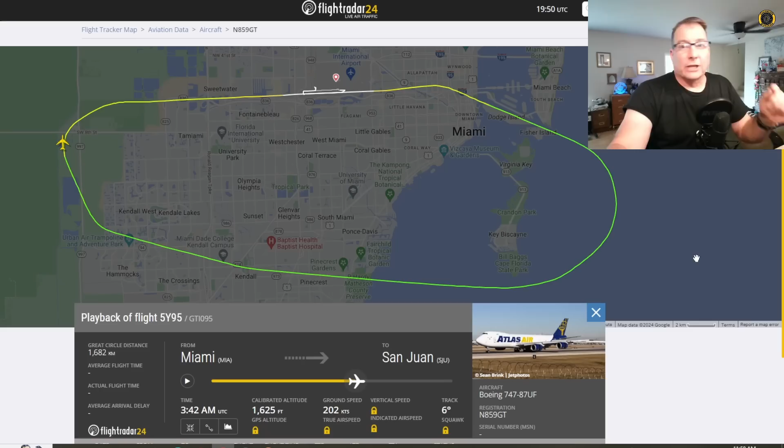They did mention that the fire occurred on the climb out, and that it took them about 2 minutes dealing with this engine fire. So it sounds to me like it didn't quite go out right away, and looking at that video, it looks like that may very well have been the case.

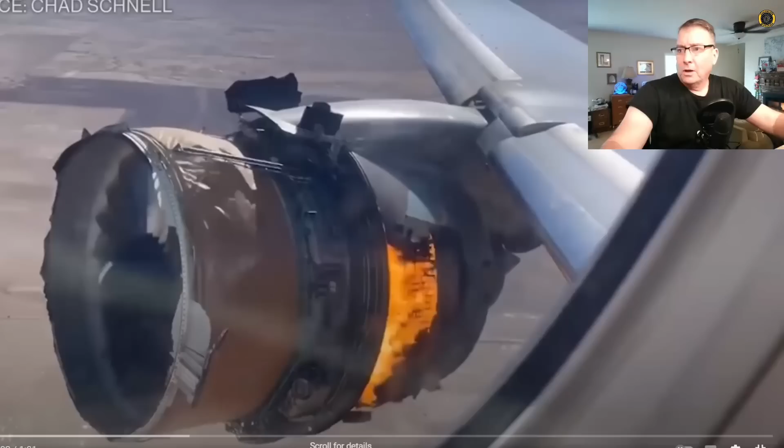That could have been initiated by compressor blades initially failing and then going through the turbine section, losing the blades, but the crew did not say anything about a bird strike or anything like that — they just said they had an engine fire. So I'm suspecting turbine blades. Remember, when you shut down one of these engines, the jet engine will continue to windmill even after it's been shut down, so it may continue to shed a few parts.

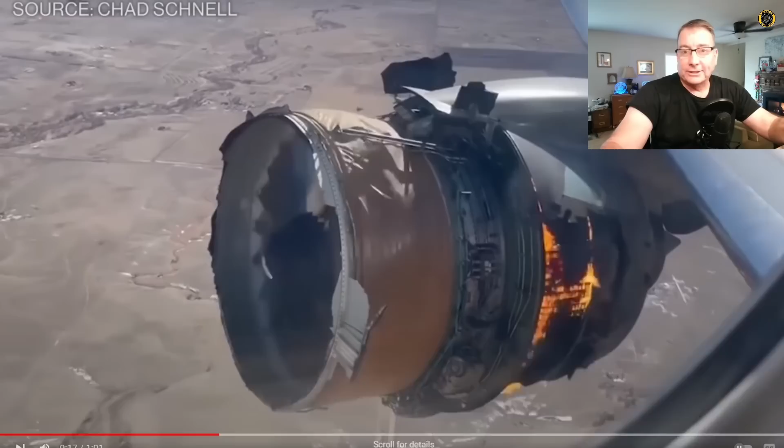This was the Boeing 777 out of Colorado coming back into Denver. This was a rather extraordinary case where they lost the cowling and everything. But the engines will continue to windmill after they've been shut down.

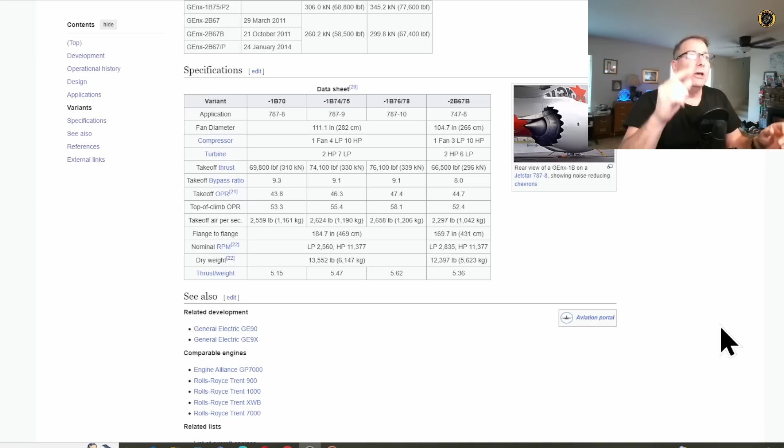This is the GEnx series of engines used both on the Boeing 787 Dreamliner and the late model Boeing 747-8 freighter aircraft. The interesting thing is on the Boeing 787 there's no bleed air system — it's more of an electrically operated aircraft. So only on the Dash 2 models on the 747 freighters does this particular engine use a bleed air system. Like most modern jet engines, it's got a high pressure section and a low pressure section separated by two separate shafts. Here, the high pressure turbine section drives the high pressure...

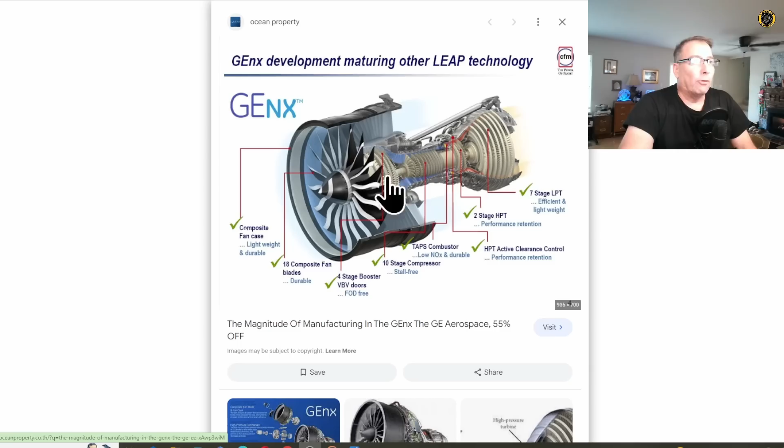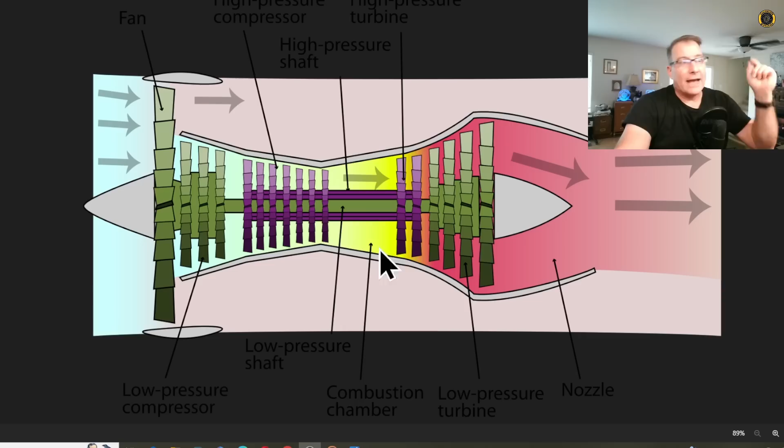If this shaft fails, the low pressure turbine section displaces a little bit back to the rear of the aircraft. It doesn't leave the aircraft altogether. It just moves slightly enough to start banging these low pressure turbine blades into the nozzles and creating all kinds of havoc inside the engine that might very well look a lot like what we saw in the video. The same thing could take place if we just lost one of these blades somewhere along the way and those blades started cascading through the engine and dislodging additional blades.

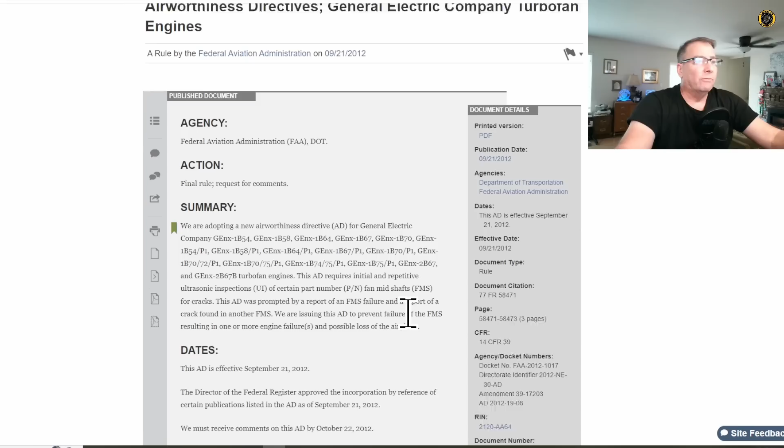Here's the airworthiness directive that applies to these engines. It's AD 2012-19-08, which came out back in September of 2012. It affects the entire series of engines, including the Dash 2 Bravos that are put on the 747 freighters. This AD requires initial and repetitive ultrasonic inspections of certain part numbers of the fan mid shafts, those shown in green, for cracks. This AD was prompted by a report of a fan mid shaft failure and a report of a crack found in another fan mid shaft.

Now, according to this AD, you've got to do ultrasonic inspections on these shafts repetitively every 90 days. For those of you out there operating in the field, can you tell us, does this airworthiness directive still apply? Are you still having to inspect these shafts every 90 days, or has there been an improvement in the manufacturing of the shaft itself that no longer makes this AD applicable?

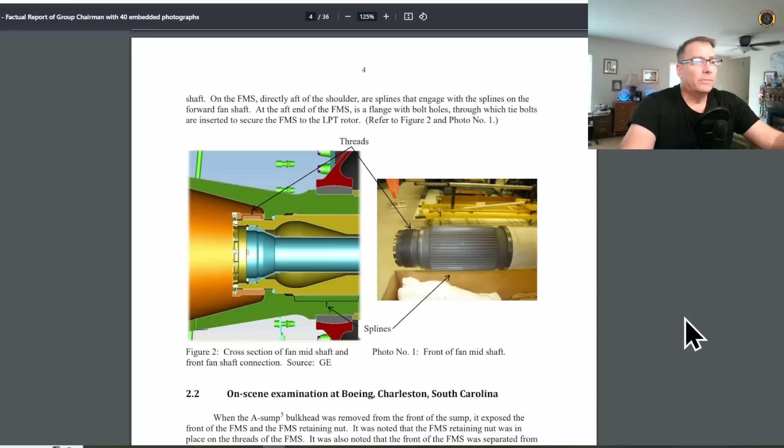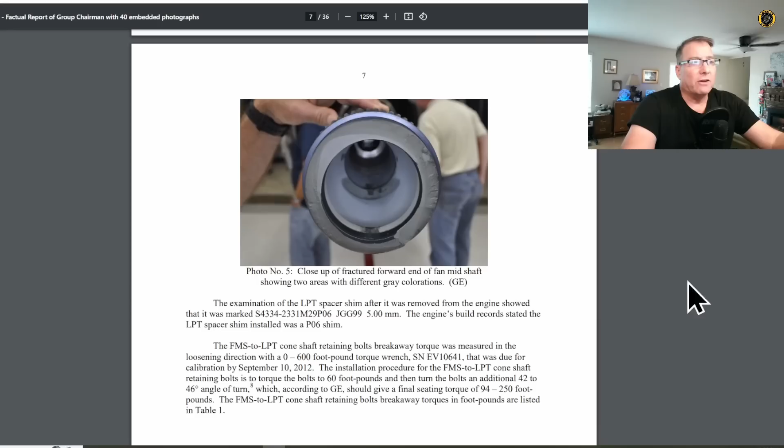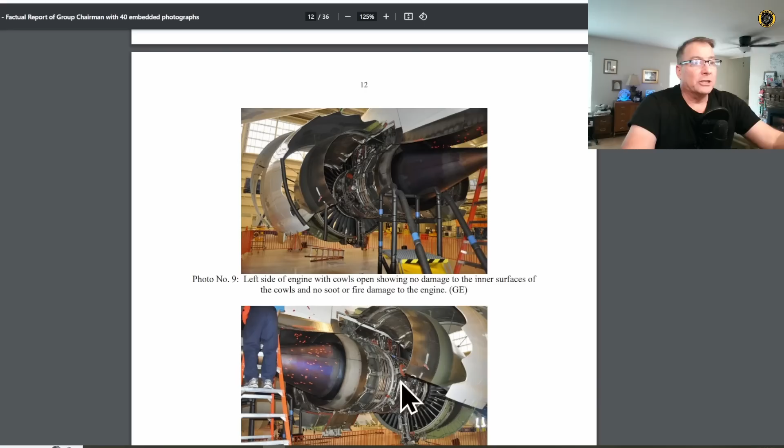This AD came out as a result of a mid-shaft failure on a Boeing 787 just doing a taxi engine run test back in 2012. They found the shaft to fail right about here, and here's some pictures of the broken shaft. I've not heard of any other additional problems with this since 2012, but I haven't done real thorough research on that. But there's the failure of the shaft just prior to the low pressure turbine section, and that turbine section shifted back, sending quite a bit of debris out the back of the engine. The engine failure and subsequent turbine failures were completely contained in the engine.

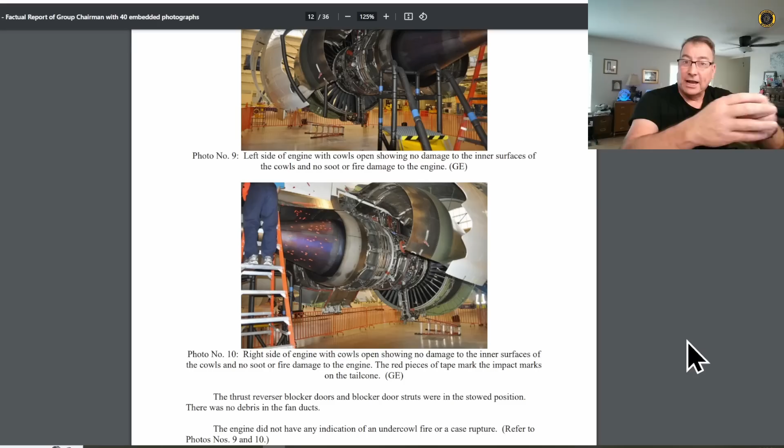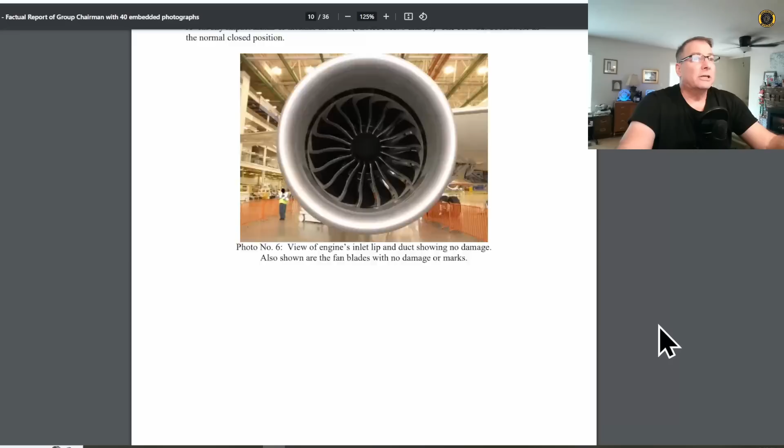This is going to be real interesting to see on this latest case in Miami. Was this a contained engine failure or an uncontained engine failure? With the size of that softball size hole, this may be classified as an uncontained engine failure. We got to see where that softball size hole is in the Miami case, because there's a section of Kevlar that's supposed to protect this engine from uncontained engine failure over the compressor and fan section, and there's a hardened alloy steel section that protects this low pressure turbine section.

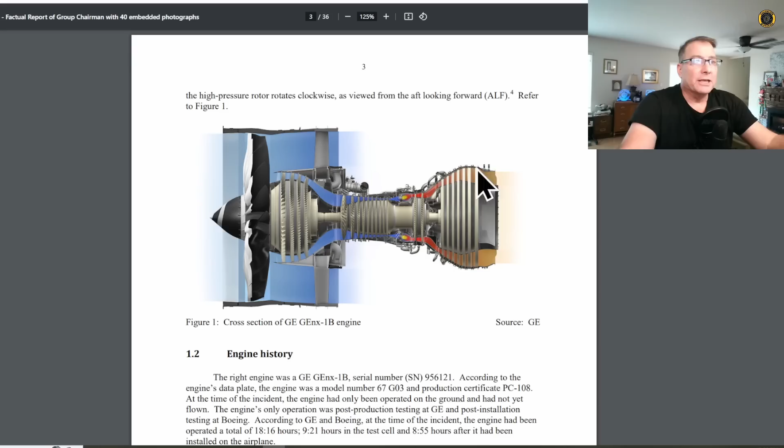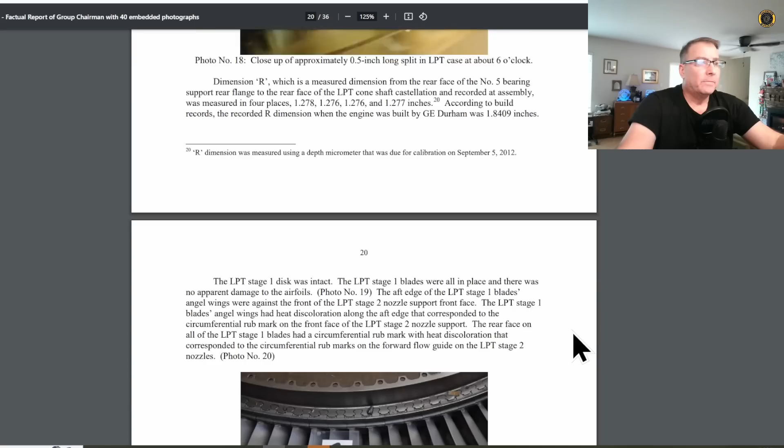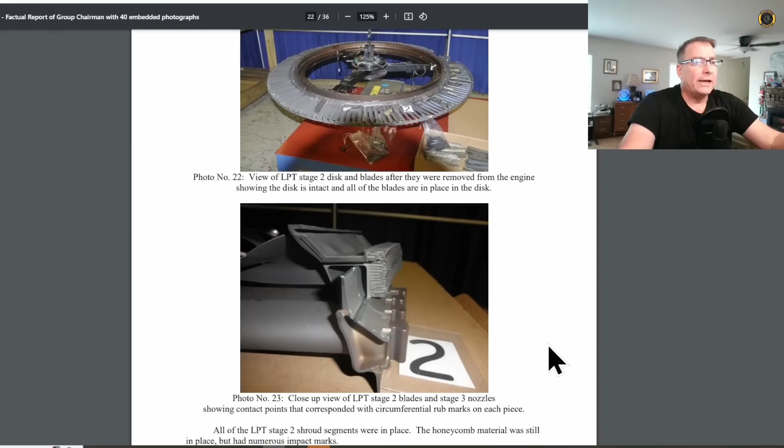In the 2012 787 shaft failure, here's the damage they found in the low pressure turbine case. It did poke some holes in there. And here's some of the damage to the low pressure turbines themselves as they rubbed up against the nozzles once they shifted slightly aft. So once these things start failing, you've got a whole bunch of tiny little blades that can create a large shower of sparks out the back of the aircraft and set off a fire indication up in the cockpit.

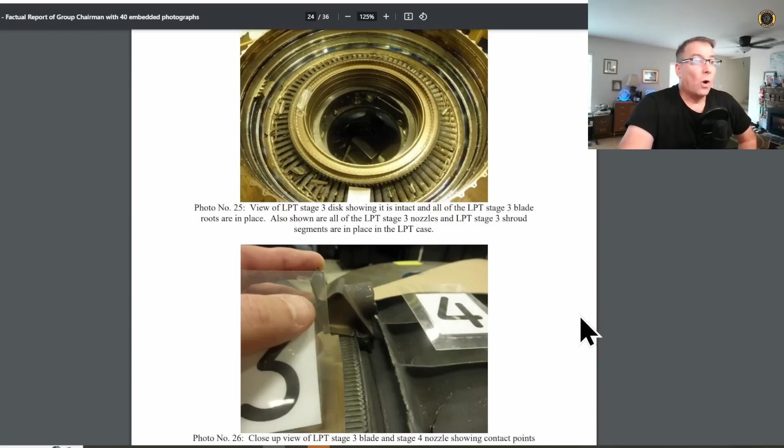Or an engine fire can initiate the whole series of events of cascading turbine blade failures. But for the media to conflate this story with the Boeing 737 door story is completely irresponsible. This is an engine problem on a General Electric engine that just happens to be mounted on a late model Boeing 747-8 freighter.